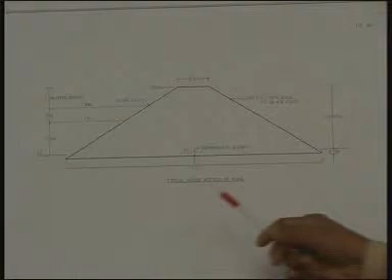The earthen dam section that has got to be used for the mini percolation tank is exhibited here. This is the ground level, and this is the formed earthen bund.

While forming this earthen dam, we have to excavate the bottom soils for a depth of about 4 to 6 inches, since the grass roots and other vegetative material in the top surface would contain roots of grasses and plants. That has got to be removed, otherwise the dam foundation will start leaking.

So we have to remove the topsoils, what is called stripping of topsoils. This topsoil has got to be removed and kept separately as a heap, and should not be used for formation of the earthen dam.

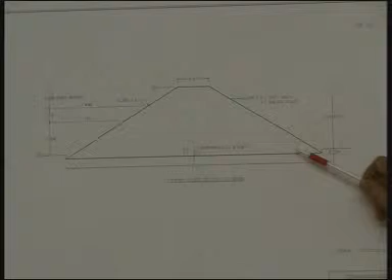When the earthen dam has to be constructed, the soils from the borrow area would be in the submersion area. For example, this is the ground level, this is the water level when it is full, what is called FTL, full tank level. When it overflows during very heavy rains, the water level rises above while it overflows over the spillway, and this is called the maximum water level. At no time does the water level exceed this level.

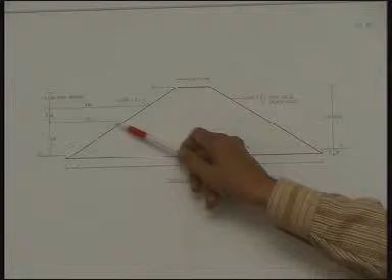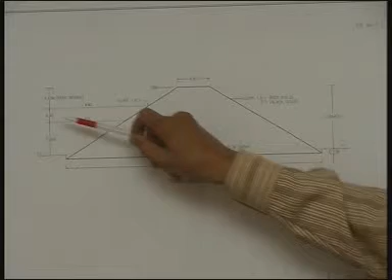There is a freeboard of 0.6 meters above the maximum water level. Above the FTL, the space is nearly 1 meter depth of water and 1 meter above the FTL, out of which 0.4 meter is taken for the MWL line, that is when it overflows over the surplus weir, it reaches this level. So this freeboard is essential, 0.6 meter freeboard above MWL, meaning the top of the bund has got to be 0.6 meter above the MWL.

The top width is 0.9 meter and the side slopes are 1.5 to 1, that is 1.5 horizontal and 1 vertical. This slope also is like that, 1.5 to 1.

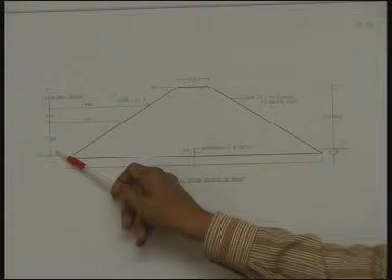This is all for red soil areas. If we have black cotton soil or clayey type soils, the side slope will have to be flatter than this, 2 to 1, 2 horizontal and 1 vertical. A black soil or clayey soil has lesser density than red soil, and due to that we require a bigger section of clayey soils.

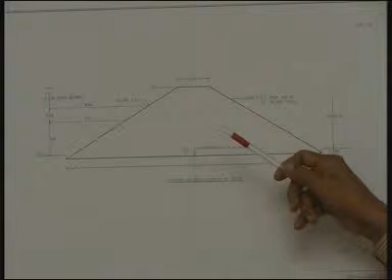Usually people think clayey soils would be very good for an earthen dam. Actually it has got lesser density, and therefore the stability will be less for black or clayey soils. In the case of red soils or sandy clays or gravelly clays, the density is much more than black or clayey soils, and therefore a smaller section would be adequate for the earthen dam.

The borrow area soils, as I said, have got to be obtained from the submersion area. We will see in another map what that submersion area would be. Submersion area extends onto this side for a distance of about 50 meters or 100 meters, and in that area we can make pits. The details of those pits are in the other drawings.

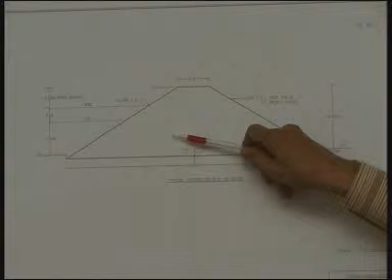We borrow from the submersion area soils and deposit it onto the earthen dam, and this deposition has got to be done in layers of 6 inches. One layer of 6 inches has to be consolidated by moving a hand roller, a 1-ton roller we call it. If the roller is not available, a tractor can be drawn and can ply on that, and tractor consolidation can be done. After consolidation of the 6 inches layer, another 6 inches will be spread, and like that, the earthen dam has got to be built.

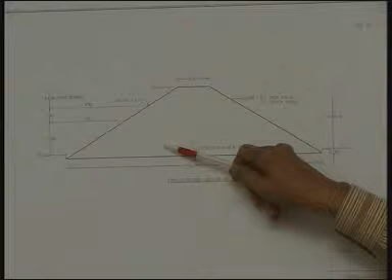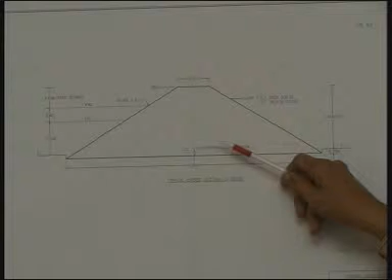Consolidation is important here, otherwise the dam will start leaking. While doing this consolidation, there should be some minimum moisture in the soil. If the excavated soil is not having sufficient moisture, we may have to add some water to get the optimum moisture content. In most cases, the excavated soil will have the requisite moisture, and it is just necessary to do the rolling with a tractor or a 1-ton roller.

After completing this section, the soils which are excavated, called the stripping soils, which are heaped separately, have to be spread on the slopes and on the top. We have to spread this soil.

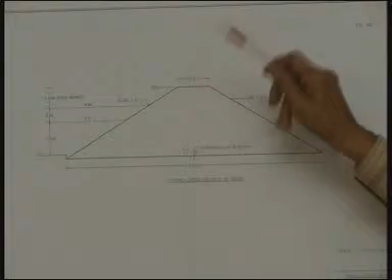The idea is, when it rains, a good amount of grass will grow, because this topsoil has got the seeds of grass and also some vegetative material and good amount of nutrients for grass to come up. That is the nutrient rich soil. The topsoils are always nutrient rich soils.

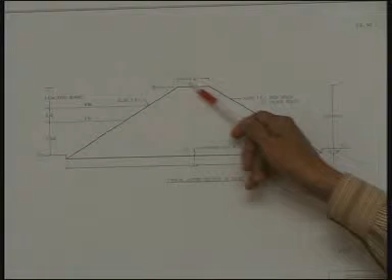When you spread the nutrient rich soil on top of the earthen dam, and we get the first rains, we see immediate sprouting of grass.

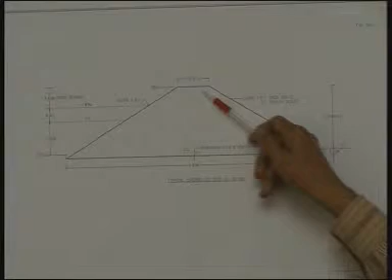If there is no topsoil at all, and it's just borrow area soils used for the earthen dam, when it rains, not even a blade of grass will come up, because these are all structural soils which will not have any seeds of grass or nutritive material for any grass cover. This grass cover is needed for a number of reasons.

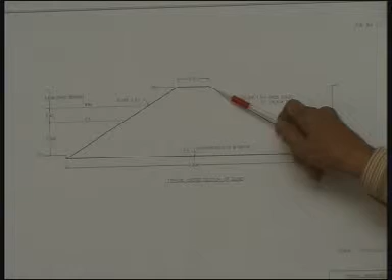One is, it protects the sides from erosion. When rains occur, there will be soil erosion, rill formation, and when there is grass here, it will avoid the rill formation and erosion of soils. It's also needed here because it will prevent the erosion of soils on the slope.

So that's one aspect. The second aspect is, it keeps the particles of soil bound well, and even when there's a small ripple or wave hitting against the sides, because of the grass there won't be any disturbance of the soil, since the grass keeps the soil well bound with its roots.

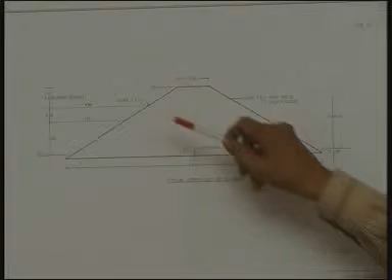Actually, there is no need to have revetment here. Many people think the dam will be safe only if we have revetment here. Revetment is stone revetment, rough stone revetment.

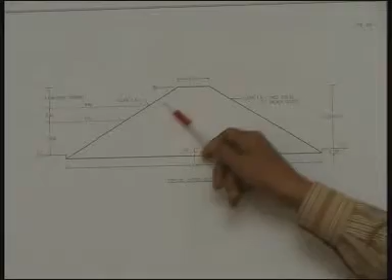Now why is this revetment required? It is required for withstanding wave action. Suppose there is revetment here, and this is a big tank, with a water spread of about 1 kilometer, or in some cases 40 kilometers in the case of major reservoirs. So a big water spread is there, and when there is a gale or cyclone, there would be wave action created.

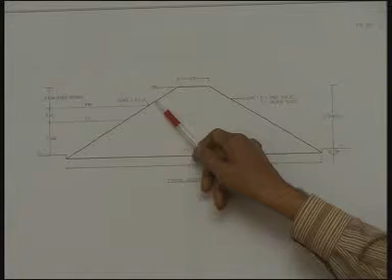The wave height depends on the velocity of wind and the fetch of water, that is the length of water body available there. That determines the height of the wave, and the wave hits against the sides of the earthen dam.

As the wave hits, it displaces the soil particles, and as it hits, it has a run up, it runs up, and then it withdraws. Just like wave action on a beach, we see a wave hit the beach, run up, and then withdraw again.

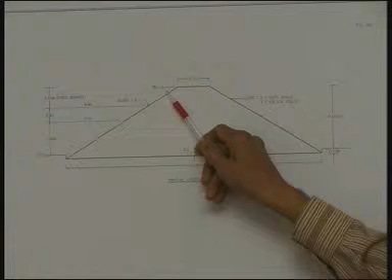So at the time of withdrawing, the wave draws the soil particles along with it. There will be erosion of soil, since it's already disturbed by the wave hitting, and the wave run up and retreat will suck out the soil particles. So we require revetment here in order to withstand the wave action.

And when this wave hits here, if there is stone revetment, it can withstand that and no soil erosion takes place.

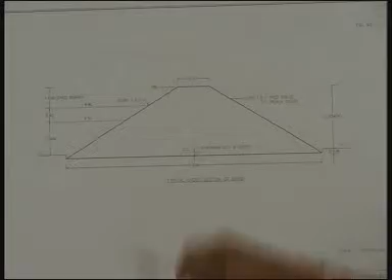But in the case of minor storage like this, with half an acre water spread or a water spread distance of about 60 meters, the wave is imperceptible. Even if there's a small wave hitting against this, whatever grass is there can take care of it. So there's no need to have revetment.

And when we avoid the revetment, the cost of the structure gets reduced to one-third. For example, the earthen dam costs around 8,000 rupees without revetment. With revetment, the same earthen dam would cost 25,000 rupees. So there's no need for an expensive stone revetment, because technically it's not required.

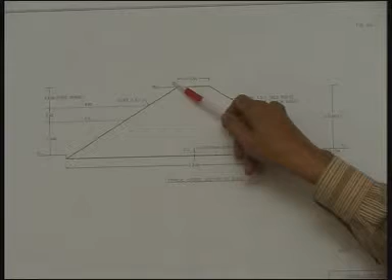Once the grass comes up here, it's not required, and therefore we can avoid that. So in all the mini percolation tanks, we don't provide for any revetment at all. But we ensure the top is covered with the stripped soil, which contains the nutrients and the grass seeds.

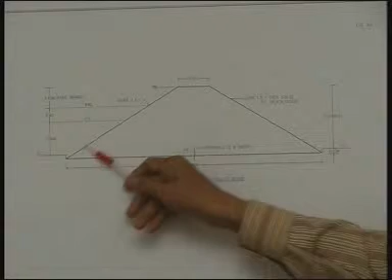Similarly, in the borrow area, the top 4 to 6 inches layer of soil should not be used for the earthen dam. We have to excavate this top layer, which contains grasses, roots, seeds, and other vegetative material, and keep it as a separate heap. That heap can later be spread over the earthen dam, giving us good nutrient soil to support grass cover, which brings down the cost of the structure while keeping it stable and strong.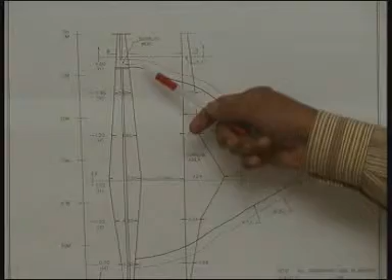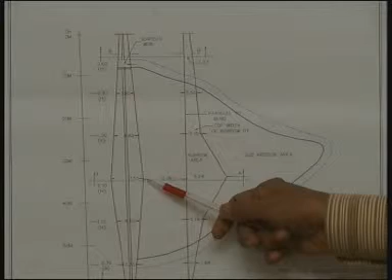This is the earthen dam plan. For example, the length of the earthen dam is depicted here, nearly 60 meters, built on the lowest portion of the ground. So we find a wider section of the dam here, and as we go towards the end, the ground levels increase, so the height of the dam becomes lesser and lesser. This would be the bottom width of the earthen dam.

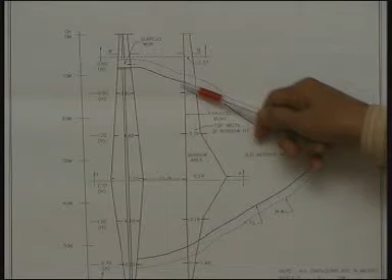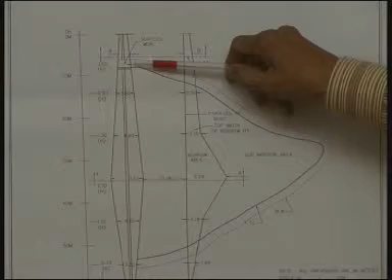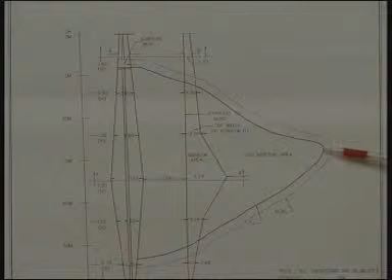The submersion area caused by this earthen dam is shown here. This is the FTL contour, that is, when the water level reaches the sill of the surplus escape or surplus weir. A surplus arrangement must necessarily be provided at one end of the earthen dam. The stream, flowing like this, is bunded by the earthen dam, creating a storage. Suppose storage is already created with initial rains, and further rainfall occurs in the catchment area of about 5 to 10 hectares. When this further rainfall occurs, it all has to spill out of the structure.

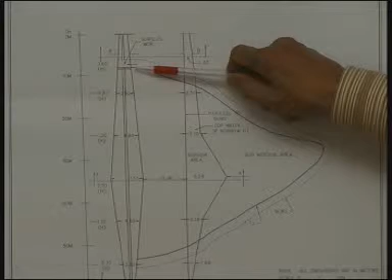Otherwise, the water level rises and causes a breach in the structure. So for any earthen dam of this type, irrespective of size, we have to provide a spillway. It is necessary in all cases. The length of the spillway depends upon the catchment area. A bigger catchment area results in a bigger flood flow, so the length would be longer. A smaller catchment area results in lesser discharge, so the spillway length can be shorter, even a small length would be adequate.

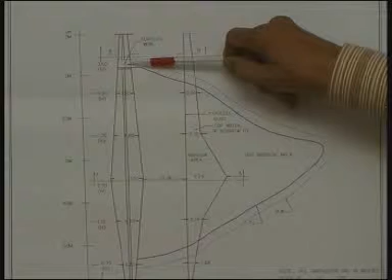The design of the spillway, its length, and other features are explained in subsequent posters. Now, when water overflows over the spillway, it occupies a higher level, and this would be the extent of submersion when overflowing. This is called the maximum water level line; submersion will not exceed this line.

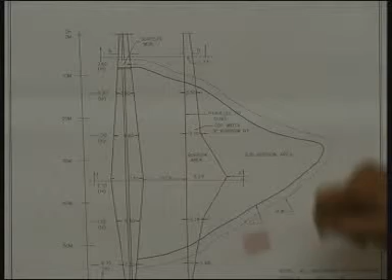The submersion would be up to this point when it is at the brim, with no surplusing occurring. Now, we thought of excavating certain soils for forming the earthen dam. That soil could come from this zone, what is called the borrow area, which could lie within this submersion area. Whatever soil we get here can be used for forming the earthen dam.

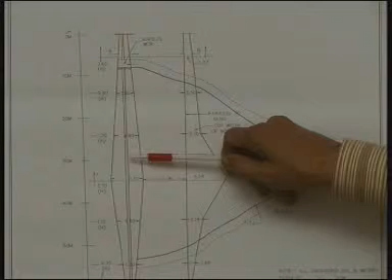In the case of red soils, the earthen dam has a slope of 1.5 horizontal to 1 vertical. But in the case of black soils, the earthen dam slopes on either side would be 2 horizontal to 1 vertical, making it a flatter and bigger dam section, as we have already discussed.

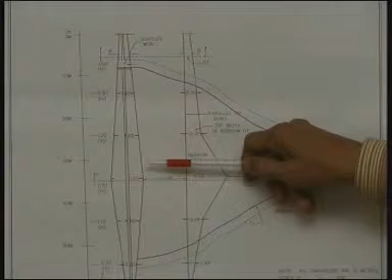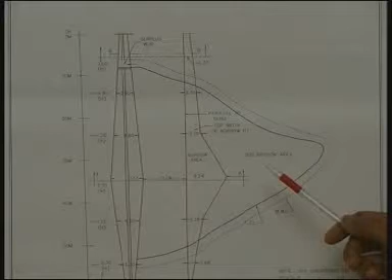This portion of the submersion area would eventually get silted up, and this will also be useful for plowing and cultivation, even in the intermediate stage. This area can also be cultivated when the tank gets emptied, that is, after the rains, say after October, when the main monsoon season is over, the lake or small storage would percolate down and dry up completely. Then with the residual moisture in the soil, one can raise a rabi crop starting from mid-October, and the crop can come for harvest by mid-February.

This is with the lowest evapotranspiration requirement of the crop in the year. For example, the evapotranspiration requirement in summer will be very high, whereas in winter it would be very low. And in winter, especially in December and January, there may be dew also. So the crops can come up very well with the residual moisture as well as the dew.

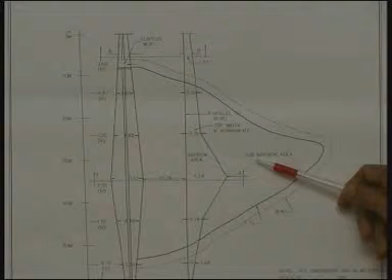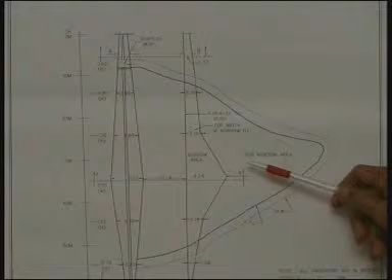Crops like horse gram and cowpea can also be grown in this area, and they can get a good crop yield. So the farmer doesn't really lose the land under submersion, in the sense that though he may not be able to raise a kharif crop, he will certainly be able to raise a rabi crop.

The farmer may lose some land in the formation of the bund, but here also he can plant trees on the bund, on the slopes and on the top. He can raise green manure trees, or have fruit-bearing trees, and make use of the bund for raising all types of trees, whatever he requires.

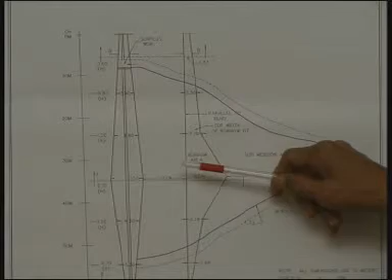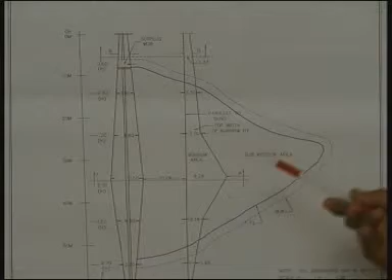So he doesn't really lose any land, and farmers are coming forward to have these mini percolation tanks in their fields. This is because a quantity of stored water goes into the subsoil and recharges the water table, and this happens something like 10 to 15 times in a rainy period. For every big rain it gets filled up, and supposing we have 10 such rainy periods, 10 times it gets filled up, and all that water goes to recharge the water table.

Down below, whatever open dug wells he may have, there will be a good amount of recharge, and he can raise crops using the groundwater even during the summer period. That is, in the early summer period also, he can raise a rain-fed or light irrigated crop.

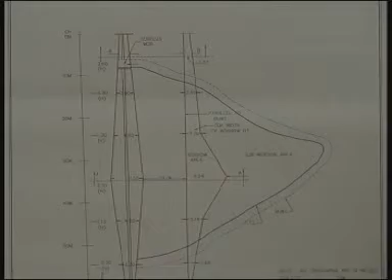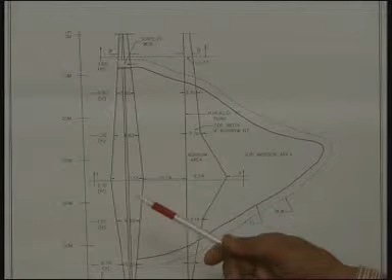In areas where these structures were already executed, farmers are able to raise one kharif crop in the downstream area, and also two light irrigated crops. So the advantage is they get a good amount of groundwater on the downstream side of the bund, almost to the same extent as is available under the command area of minor irrigation tanks.

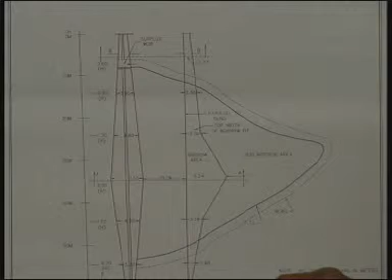As we know, in minor irrigation tanks, when the tank is partly full or full, the Ayacut area's open dug wells will have a lot of groundwater. In some cases, the water table will be almost at ground level. So a lot of groundwater is available in the Ayacut of minor irrigation tanks when there is storage in the tank.

Similarly, when there is storage in such upland areas also, there will be recharge and a good amount of groundwater available on the downstream side of such structures. So the farmer gets the benefit of raising light irrigated crops for his area.

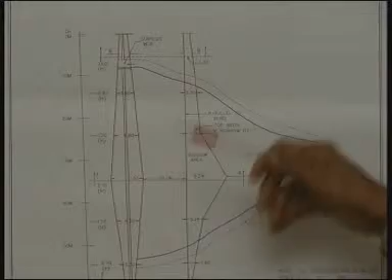Supposing he has about 2 acres of dry, rain-fed land, he loses about half an acre in this submersion, and another 1.5 acres he may have here. This 1.5 acres is assured of certain benefits, like light irrigated crops through groundwater and also a rain-fed crop.

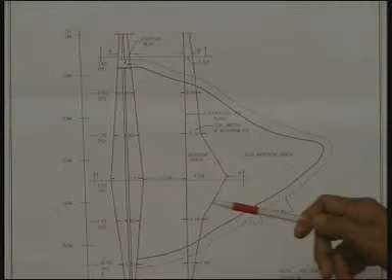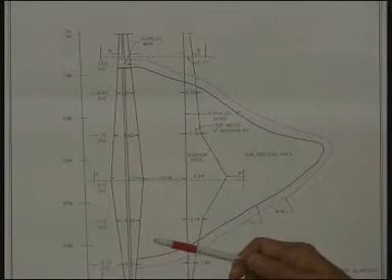In the case of one farmer in the Bhadrachalam area, it has been observed that out of the stored water, he could irrigate by gravity flow about half an acre of rain-fed paddy. The rain-fed paddy crop was withering for want of rains during the Kharif period. There was a drought spell of about 25 days.

In that drought spell, the crop had to be protected, so he used this water for one irrigation only, what is called a life irrigation. That life irrigation saved the crop, and he got a good yield.

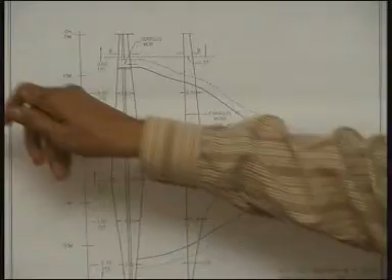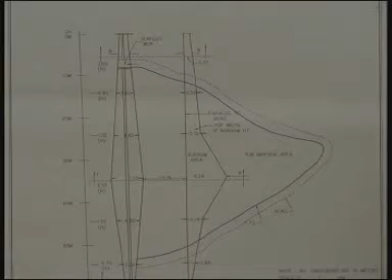Whereas the other 1.5 acres or 1 acre of land, whatever he has got, it is at a slightly higher elevation. He could not take water there, and the water was not available to that extent, so that area is a total loss. He could not even get 1 bag of paddy there in that 1 acre, whereas he got about 6 bags of paddy in the half acre because of the life irrigation. That way the farmer also gets the benefit of the stored water during a drought spell in the Kharif period.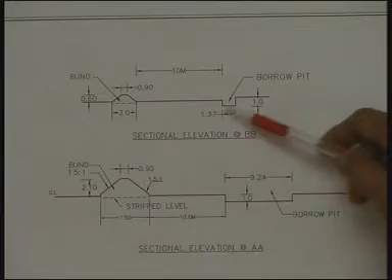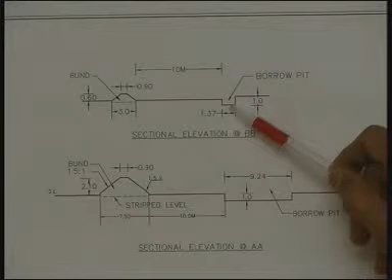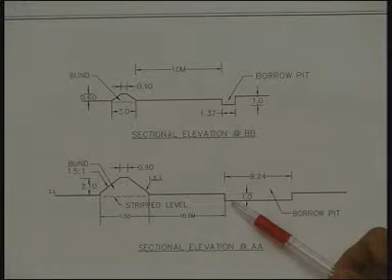This gives the view of the cross section of the earthen dam. For example, this is the ground level, this is the earthen dam at one end where the ground level is fairly high, and this is the borrow area. This borrow area has got to be at a distance of 10 meters from the earthen dam, because any pit excavated here should not undermine the stability of the earthen dam. This may not be very important for small heights, but in the case of a big height, with a 2 meter earthen dam built over the ground, the borrow area has to be at a distance of 10 meters like this.

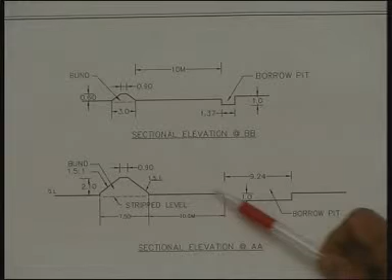In some cases I have seen the borrow area to be very close to the earthen dam, as close as something like this. That's not good for the stability of the earthen dam. So it has to be constructed keeping a minimum distance of about 10 meters from the toe of the earthen dam. The borrow area can be like this, and it also should not be very deep, could be half a meter to 1 meter depth. This soil will be dumped here and consolidated.

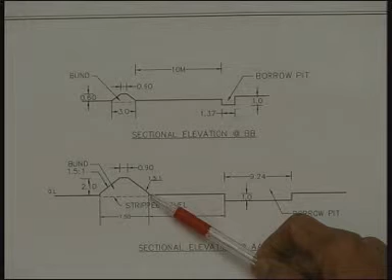So this is just an indication of the distance we have to maintain from the toe of the earthen dam to the borrow area, and it indicates the cross section of the earthen dam that will be built on the ground. As you see here, there are no key trenches or cut-off trenches. This is good for the purpose of storing small quantities of water, up to 1 meter depth.

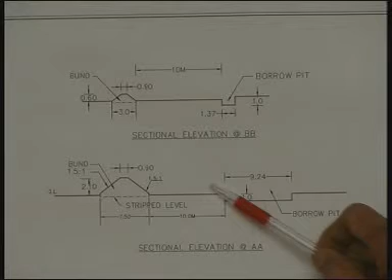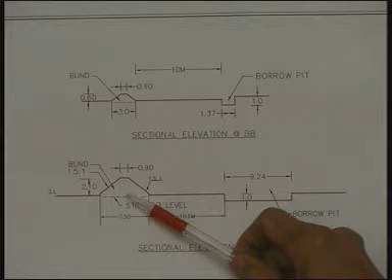Any seepage that may occur at the foot of the earthen dam, that is the toe, is due to improper consolidation or due to not removing the topsoil. If the topsoil for a depth of 4 to 6 inches is not removed and the earthen dam is built over the natural ground, then leakage would occur along the bottom of the earthen dam. So the stripping of soils or excavation of topsoils is very important.

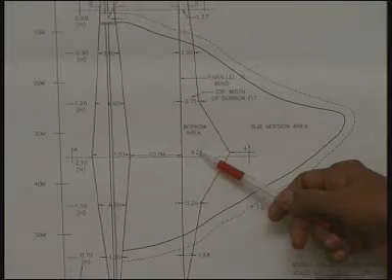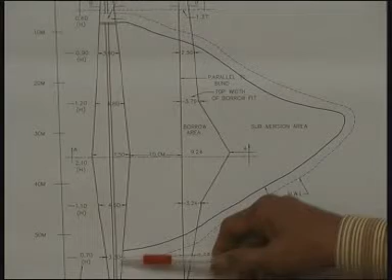Now let us discuss how an estimate for such an earthen dam can be prepared. As we see here, this is the deep course of the stream, and the earthen dam has the maximum height here, therefore the maximum width. As we go towards the sides, the width gets reduced, and again here it's further reduced. Similarly on this side also we have a reduced width, therefore reduced height, and a further reduced width and reduced height. So the heights vary depending upon the ground level.

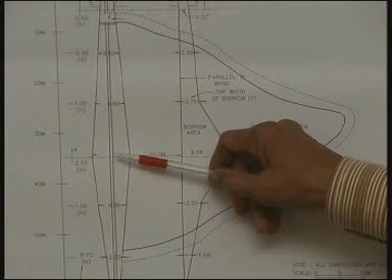The top of the earthen dam would be the same level. The ground level varies, with a lower level here and a higher level here. So for each section we have the height of the earthen dam determined earlier in another diagram.

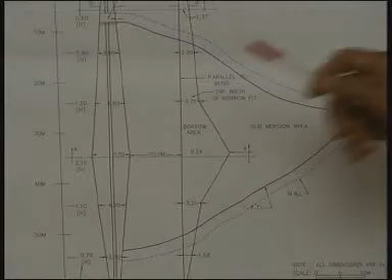The ready reckoner table given in the guidelines will facilitate preparation of an estimate for the earthen dam without actually making any measurements or calculations for quantities or working out the costs. They are all given in one line as a ready reckoner table for different conditions of heights of earthen dam, and this is applicable for all cases of such earthen dams built in any watershed.

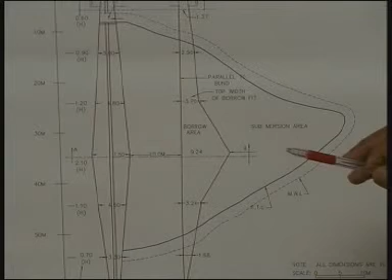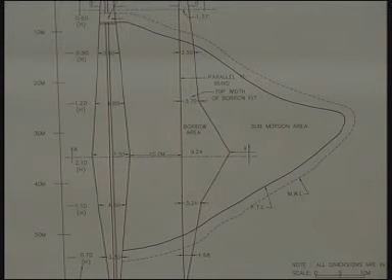So the ready reckoner tables are common for all the watersheds, but the rates given in the ready reckoner tables, for example the earthwork rate, rate for stripping soils, and the leads and other costs, vary according to the schedule of rates of that particular region. For example, the Telangana region has one schedule of rates for different types of works, and in certain other districts of coastal Andhra the rates may slightly vary. So the rates applicable for that area will have to be adopted for working out the costs.